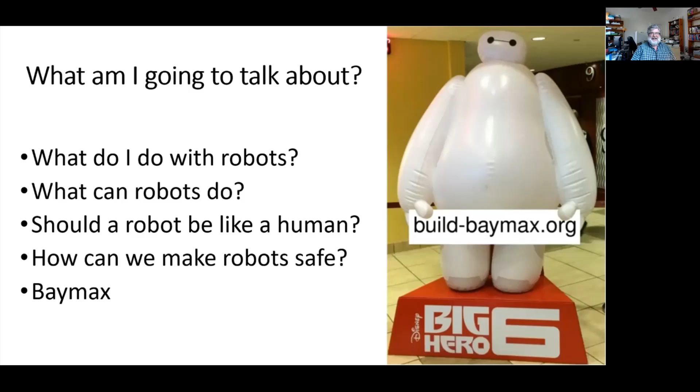Okay, good. So what am I going to talk about in the next hour? Well, I'm first going to talk a little bit about the robots I've worked with, and what do I do every day. A little bit about what can robots do, and ask a question: should a robot look like a human or act like a human? And then the question, how can we make robots safe so you can have one at home? And then talk a little bit about how the Baymax thing came about.

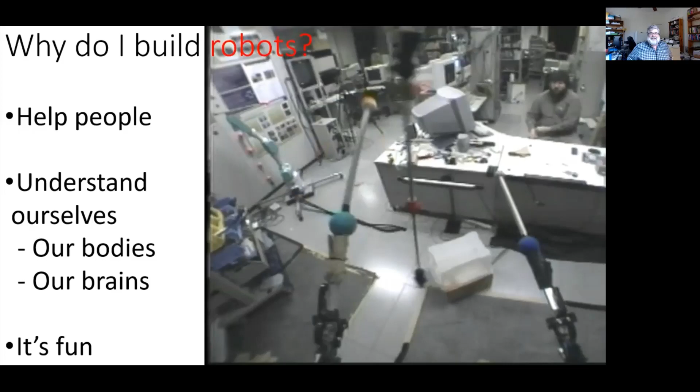Why do I build robots? I want to help people. I want to understand how people work, how our bodies and brains work. And it's really a lot of fun to get a robot to do this kind of thing. It's very exciting.

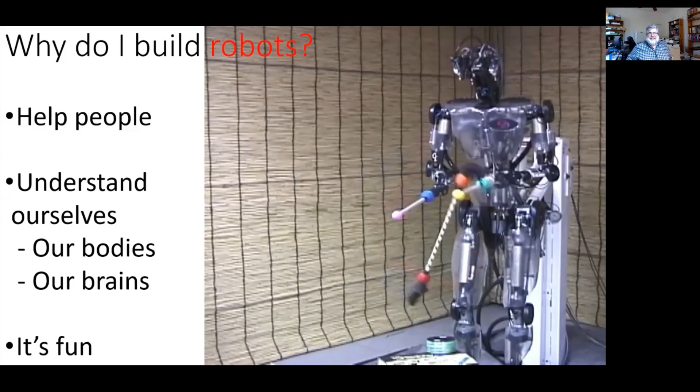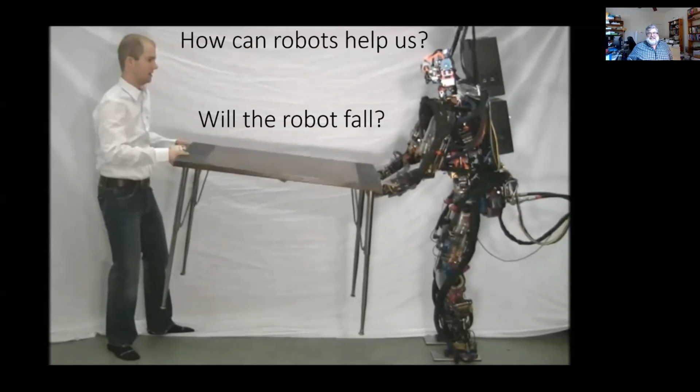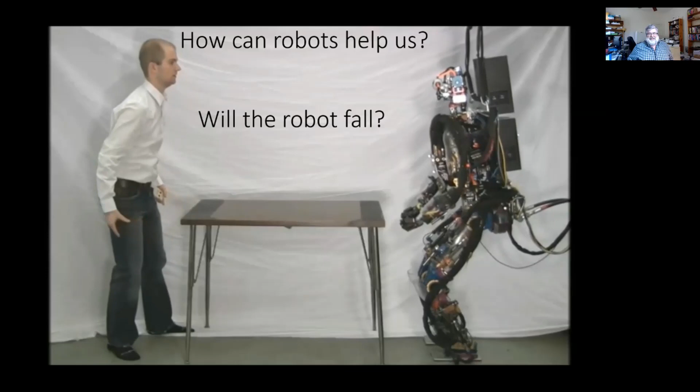Here's an example of a robot helping someone lift a table. The student, this is a graduate student, is trying to test the robot by moving the table around. He wants to see, is the robot going to fall? Later, after the robot revolution, if the robot's angry about being pushed around like this, maybe it'll come back and go after that graduate student.

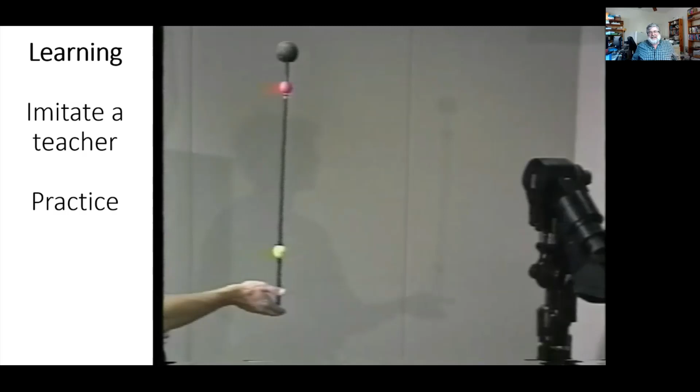It's a lot of work to program a robot to get it to do anything. So what we'd really like is to have robots learn, maybe not in the same way that humans learn, but humans do acquire the ability to do a wide range of tasks. In this case, the robot was watching the human balance a pole on its hand. This is something you could do at home with a broomstick. If you get a shorter stick, it's much harder. So you can see how short a stick you can do. Now I'm going to show you the robot if it didn't have a teacher.

And if it didn't have a teacher, it's starting from scratch. And you can see that this time it's dropping the pole, whereas if it had a teacher, it didn't drop the pole at all. So in case you're wondering, this is evidence why teachers are good for you. They help you learn faster.

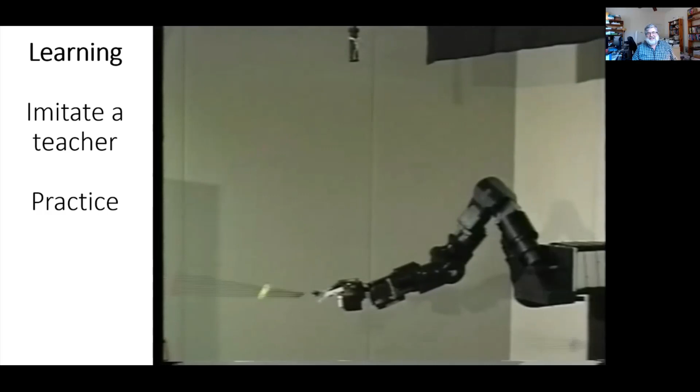There are two kinds of learning going on here. One's imitating a teacher, and the other is practicing, going off the robot and practicing by itself. And you see the weight on the top of the stick?

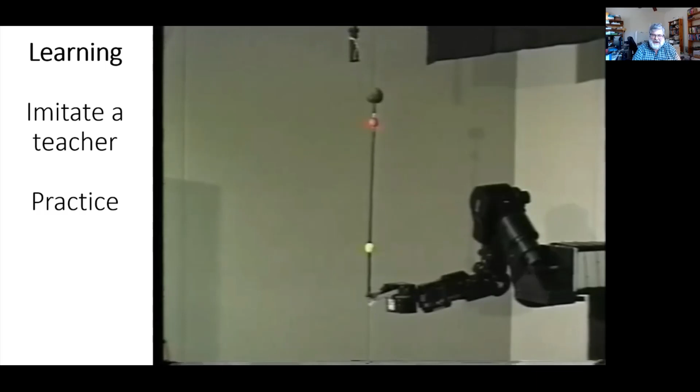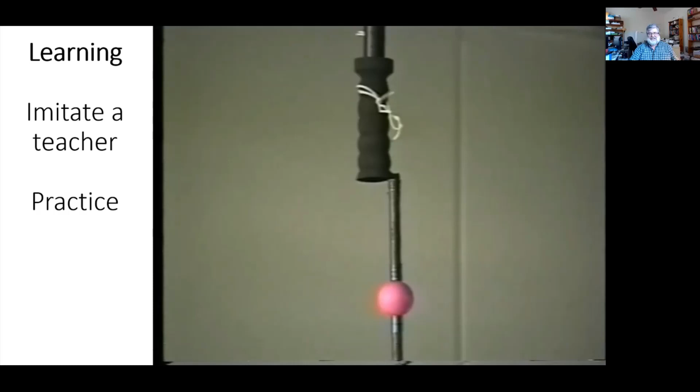We're going to remove that weight, and that changes how the stick works. And the robot's going to have to learn how to balance the stick after it's changed. So that's the top of the stick without the weight, and here we go.

It almost is able to do it, but then it drops it. Oh yeah, okay, looks like it got it the second time. So having experience on one task helps it learn a second task better or faster.

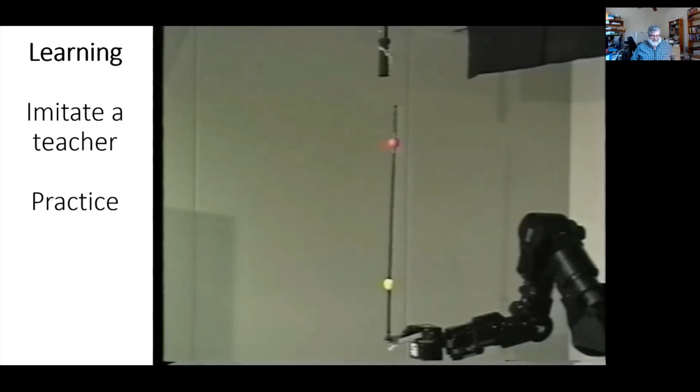Okay, here's another example. That's a young me. That's a paint roller, and what I'm doing is a task called swing up. This is after learning, and the robot can do what I did. And now I'm going to move my hand back and forth twice. So it's a little different style, and the robot learns how to do it the way I did it.

Okay, now I want to show you all the learning, how much practice the robot had to do. So this is the original demonstration. This is the robot's first try. It's not very good. This is the robot's second try, it's getting better. The robot's third try. The robot's fourth try. And that's the fifth try.

It's learning very fast. This is a harder thing to do, the double pump, because you have to get the right energy into the first swing and then preserve it during the second swing. That wasn't good at all. This is the second try, not so good. Third try, also not so good. Fourth try, it's not even getting the yellow ball above the red ball.

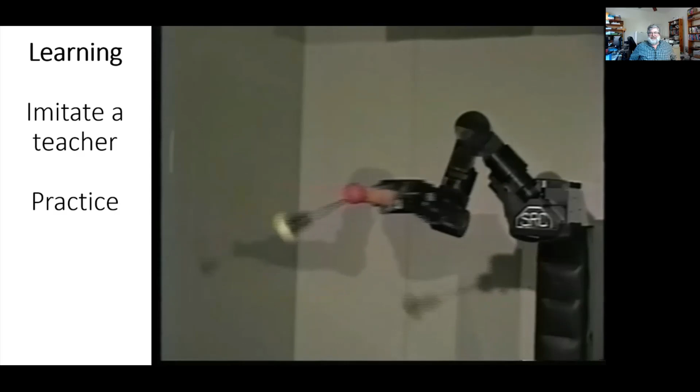Oh, here we go, we're making progress. And whoops, too far. Now many people watching this video think the robot gets angry at this point and is just swinging the thing around. But in reality, this robot has no feelings, it's not programmed to have emotion. Okay, in about 8 tries, it was able to do the task.

Here's another example of robot learning. In this case, these are two human beings, not robots. The one on the right is a graduate student. We replaced the one on the left, and what we did is we recorded all the hits that person made, a library of the hits, and then essentially put them in the head of the robot. And now when the robot sees the puck in this air hockey coming towards it, it looks into its library of what the teacher did and says, I'm going to do something similar.

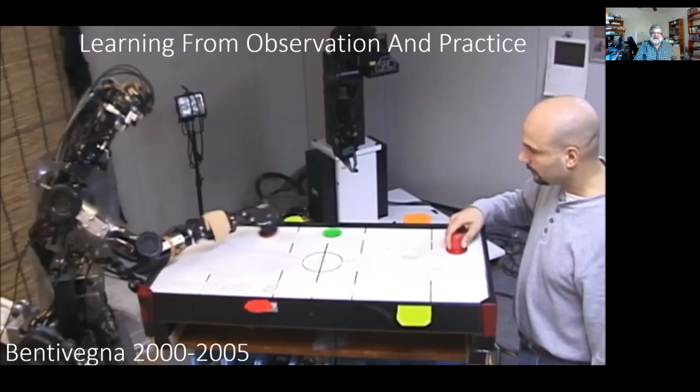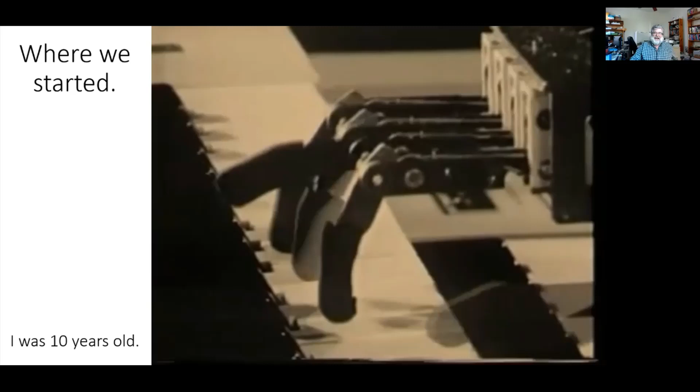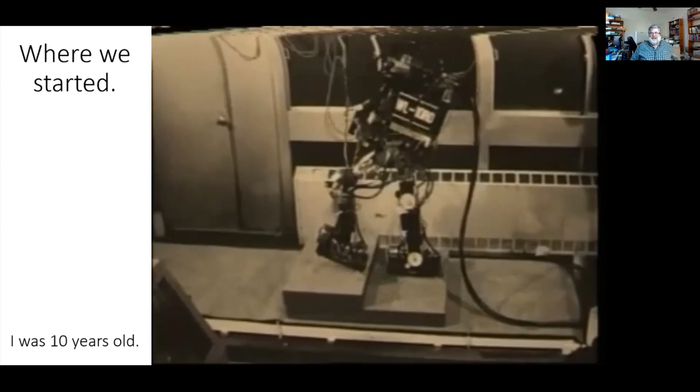I wanted to give you a little historical perspective. Here are some walking robots from 50 years ago, when I was 10 years old. And as you can see, they're very slow. This is actually a robot piano player that's providing the music for this. And a lot of these are Japanese robots. They're balancing all the time. You could yell at them, freeze, and they could freeze and not fall over, which is something that's not true when you're walking.

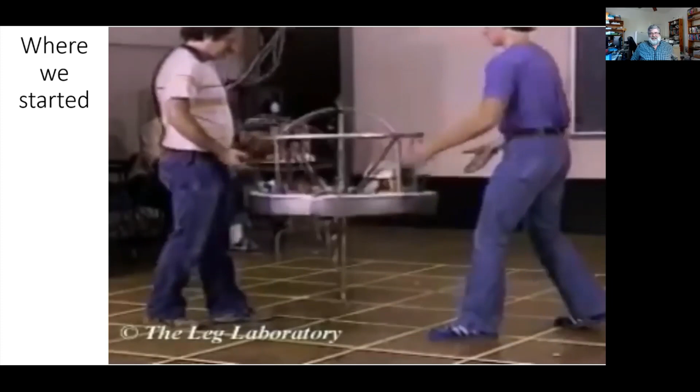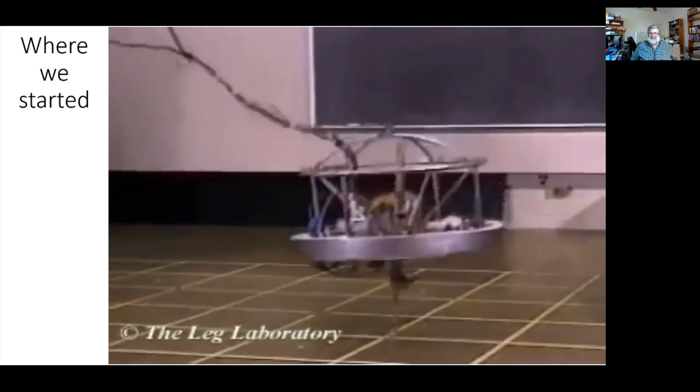Here's about 10 years later. This is when the leg laboratory was at Carnegie Mellon University. And they were actually exploring robots that had to balance, in the sense that you can't yell freeze at this robot, because if you do and it freezes, it'll just fall over. It doesn't have a big foot and it only has one leg. So this forced them to study balance.

And here we have a two-legged version on what's called a boom. And I want to let you know that the girl in the picture I eventually married. That's my wife.

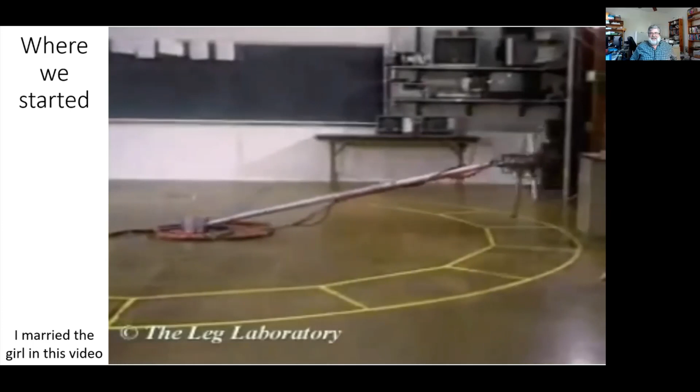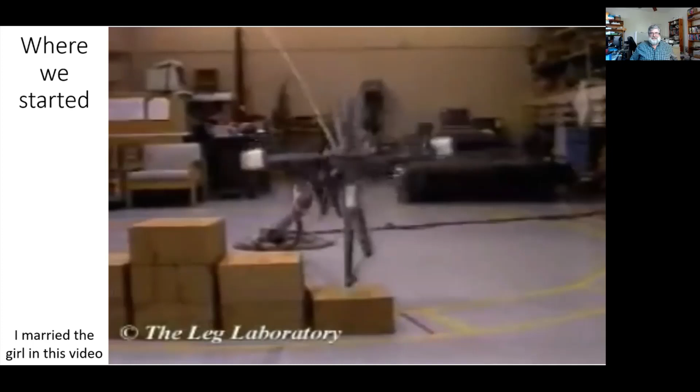Okay, so here we're running fast. So this robot can fall forwards and backwards, but it can't fall sideways because of the boom. Here it's going up and down some stairs. Here it's jumping over something. And here it's going to do a flip. And there's my wife again.

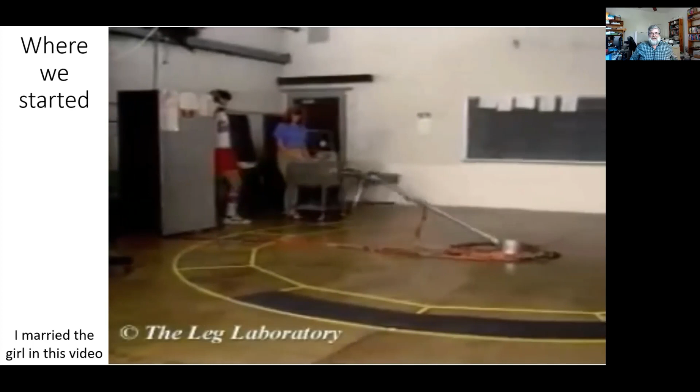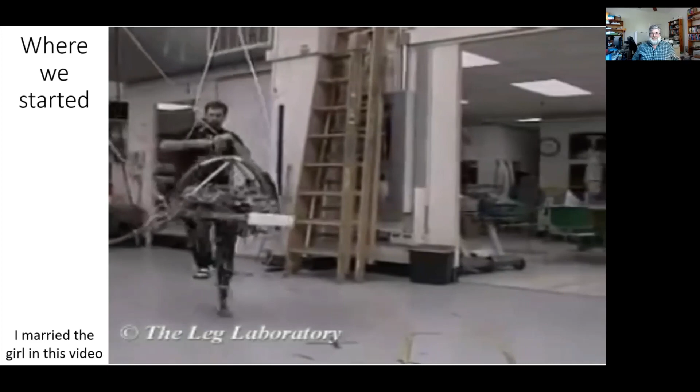Now, eventually, they got the biped off the boom. And this is the first time that particular robot was able to do a flip, so everyone's very excited. Here it is off the treadmill and doing a flip. It's a happy robot. This is a quadruped, a four-legged robot going down the hall.

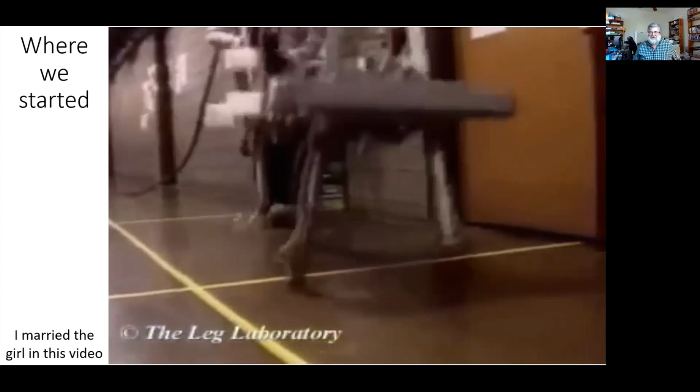Those are professors' offices and classrooms. The robot makes a lot of noise and they had to put tape on the floor to mark it. And here their lab wasn't big enough. And here again, their lab's not going to be big enough. But you can see in slow motion, the robot doing its thing.

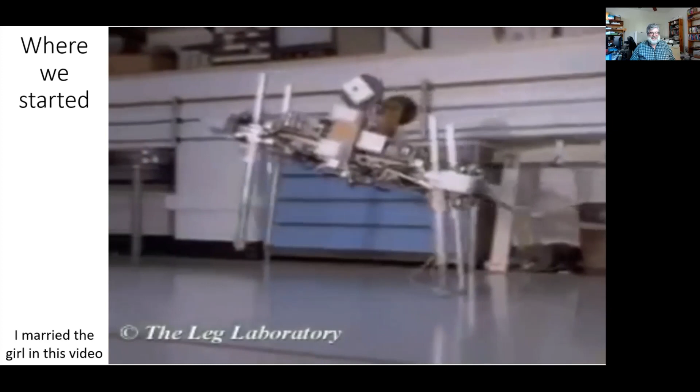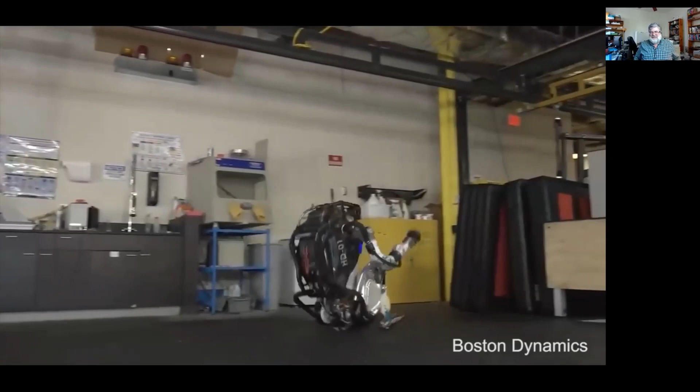Okay, now, about 40 years later, the same set of people have formed the company Boston Dynamics, and they've actually gotten their robot to do pretty amazing things.

I want you to look at the bottom of its chest, and you will see cracks where it dented itself. So it's not perfect. You see the crack? That's actually two cracks, right at the bottom of that chest. And now you'll see it without the cracks.

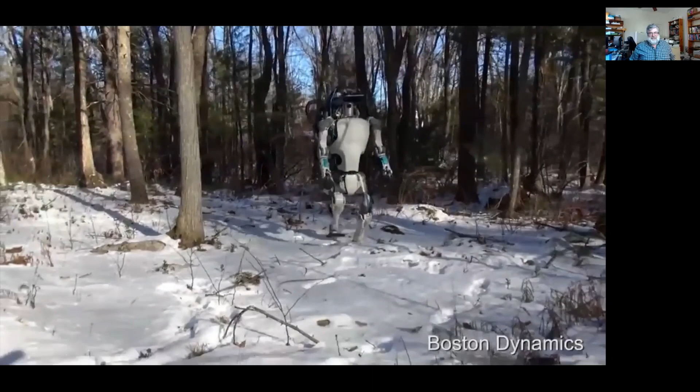Here they had it walking outdoors in the snow, and it looks pretty clumsy, but the point of this video is to show you how skillful it is that when the foot slips, it doesn't fall down. That's pretty amazing. As I'm getting older, it's harder and harder for me to do the right thing when I slip. So I'm very impressed with this robot.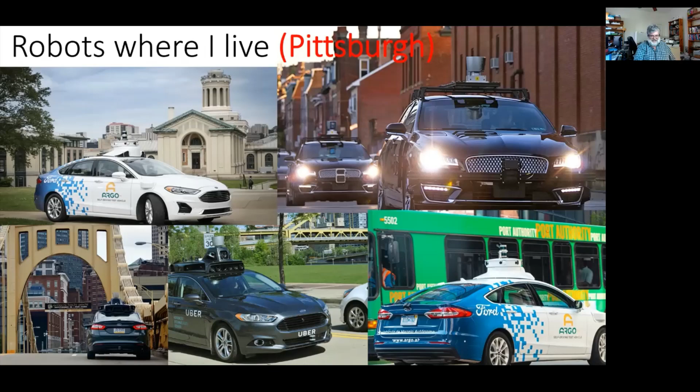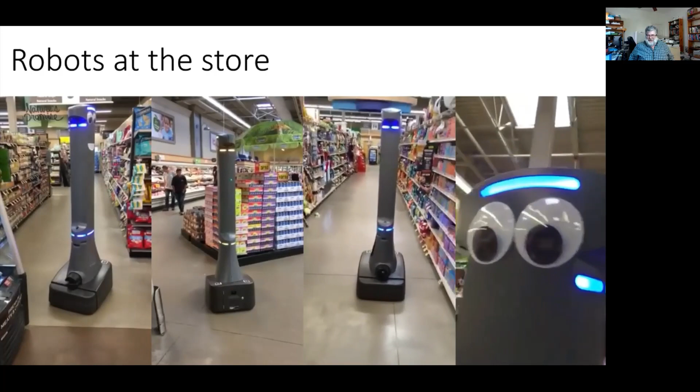Okay, so on the right-hand side, I'm going to move past it. There are the googly eyes. Ah, hi, robot, it's got a smiling face. And I threw a piece of paper on the floor, and this time it ate the paper. See, it got the paper. It's kind of like a big vacuum cleaner. The problem was that piece of paper was actually my shopping list. So after it ate the paper, I couldn't get it back, and I had no idea what I was supposed to buy.

Recently, to help doctors and nurses in the hospitals, people have been trying to put various robots in the hospitals. That's just starting out, so they're not yet all that useful, but it's clear that when we have these dangerous diseases, it's very helpful to have robots helping us because robots don't get sick.

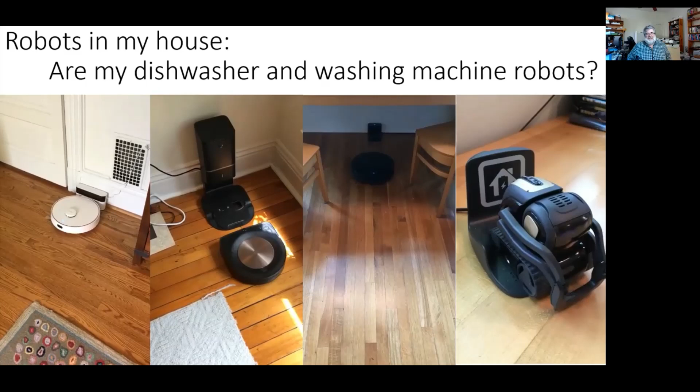Here, I wanted to show you some of the robots in my home. I have 3 floors, so I have 3 different robot vacuum cleaners because I'm trying them out. And on the right is something called a Vector. This is from a company, Anki, that actually was some Carnegie Mellon students from the Robotics Institute. Unfortunately, although the products were fantastic, they had a cash flow problem and went out of business. But my wife and I really enjoy interacting with this little robot on our kitchen table, and I enjoy launching all the vacuum cleaners every week and having them clean.

Now, I have a question for you, which you can answer on the chat. Are my dishwasher and washing machine robots? What do you think, yes or no? And what's the definition of a robot? If a robot is something that moves, the dishwasher and washing machine move. If it's something that has sensors, things that measure stuff, the dishwasher and the washing machine clearly measure stuff, at least modern ones. And do they think? Yeah, my dishwasher and washing machines have computers in them. So yeah, they think.

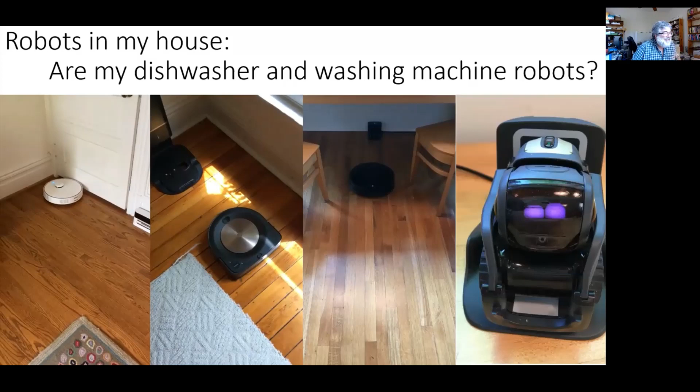So my vote is yes. What did you guys vote? Hey, yeah, I got all yeses. That's fantastic. Practically everything is a robot.

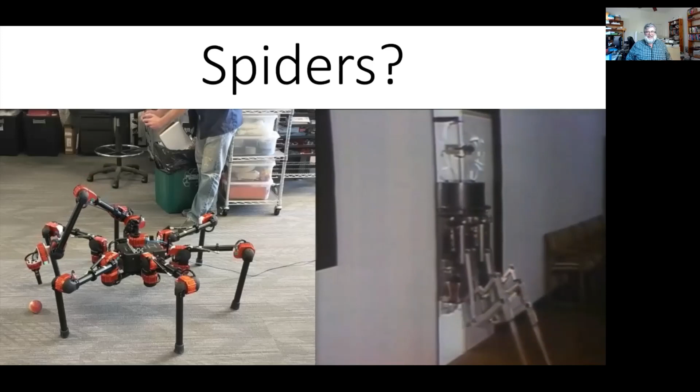So here are some robots that sort of look like spiders. They have only 6 legs, not 8 legs. The one on the left has an arm. But my question to you: is this a better robot design? One idea is if you have lots of legs, you can put hands on some of them, and they can switch between being legs and hands. If you have a lot of legs, it's much easier to balance.

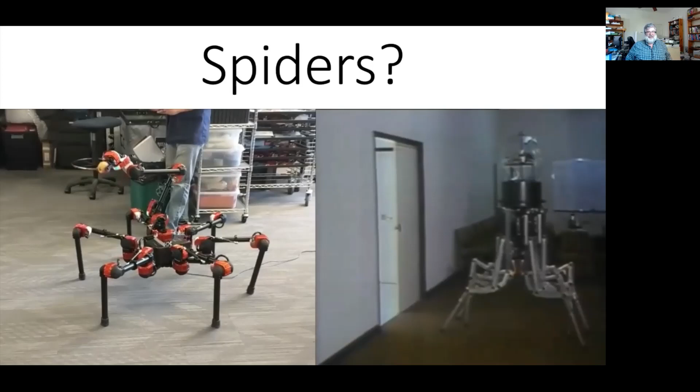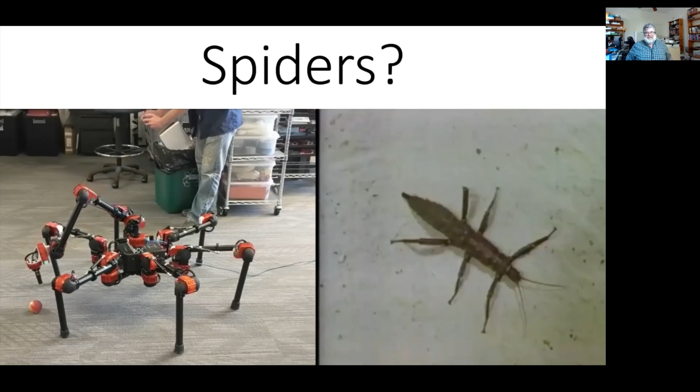So if you had 8 legs, you could still be on 4 legs and have 4 arms. In this case, they have 6 legs — you could stand on 4 legs and use 2 of those as arms. So maybe that's a much better robot. Whoops, we have a bug. Maybe that's a much better robot than those other robots.

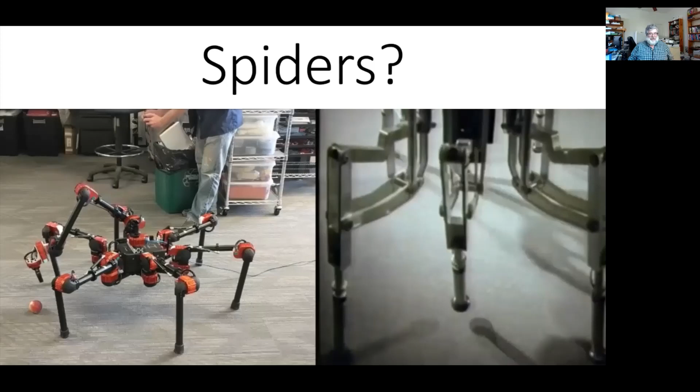But here's the question: if you were in a hospital, lying in a hospital bed, would you be happy if a robot like this came to take care of you? Or if you were an old person living in assisted living or a nursing home, would you be happy if this was the robot nurse? So that's my question to you.

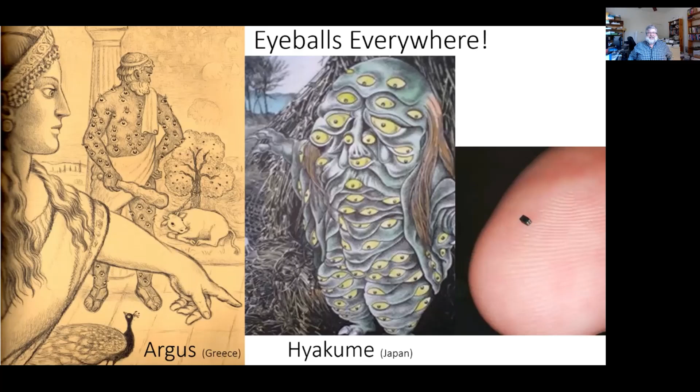And on the right-hand side, that is the world's smallest camera on top of a finger. So if you think, wow, 100 cameras, that's going to be really bulky, it's too much — we can get really small cameras.

Okay, yeah, all right. I'm not sure why the technology failed me there.

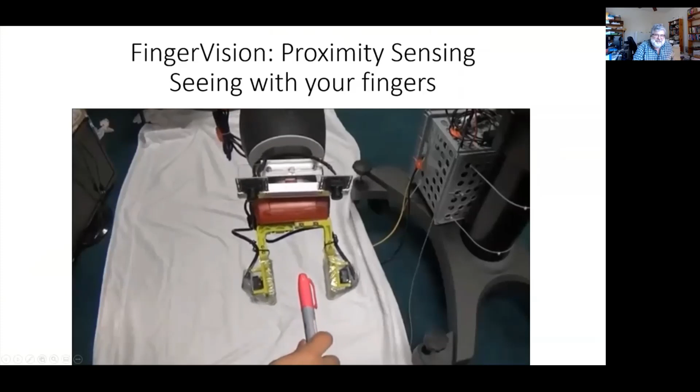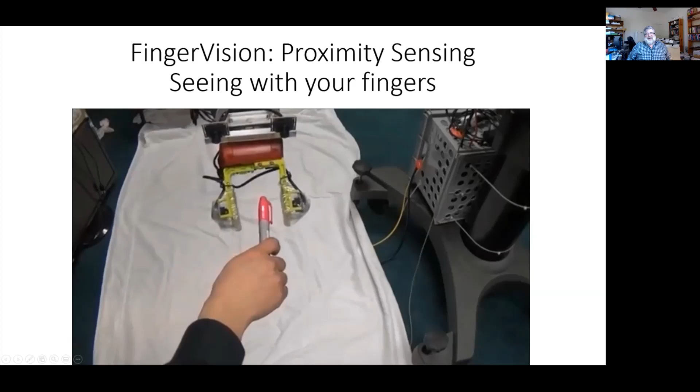So here's what happens if your fingers can see. You don't have to touch something, but you can adjust so you're always ready to grab it. And instead of stubbing your fingers on it, you just move with it. So in this case, because we have eyeballs on our fingertips, we can see with our fingers.

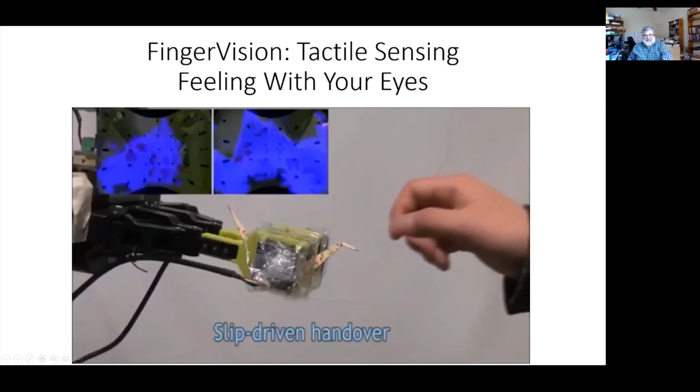And if you have eyeballs on your fingertips, you can actually manipulate very delicate things. That was an origami crane without crushing it.

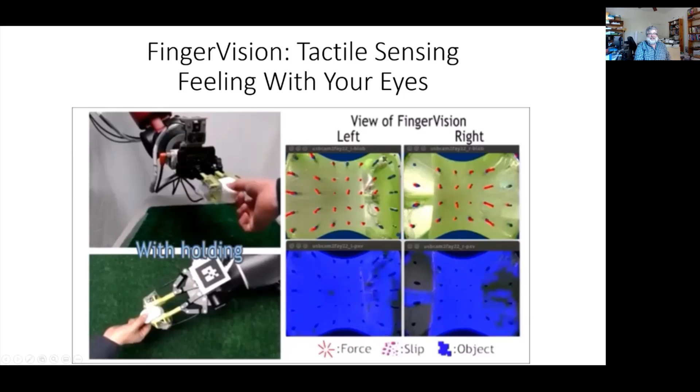And what we're about to look at is a tug of war between the robot and a person where they're both holding on to a marshmallow. So you need very good control of your forces in order to do that. That's one of my current research ideas.

How are we going to put 100 eyeballs on a robot? Here's another question. Earlier I asked you, well, is a dishwasher and a washing machine a robot? And a lot of you said yes.

Now, this is before we had Alexa and Siri and all this other stuff, so it was a big deal to get the house to talk to you. Nowadays, it's no big deal. You just buy yourself an Alexa, or if you have an iPhone, you talk to Siri or Google Home or whatever. Pretty much everybody's home and everybody's car is going to be a robot in the sense that you can talk to it.

Okay, so now I want to move on to another question, which is, how are we going to make robots safe? Most of the robots I've worked with, and here are two of them, are made out of metal and they have a weight problem.

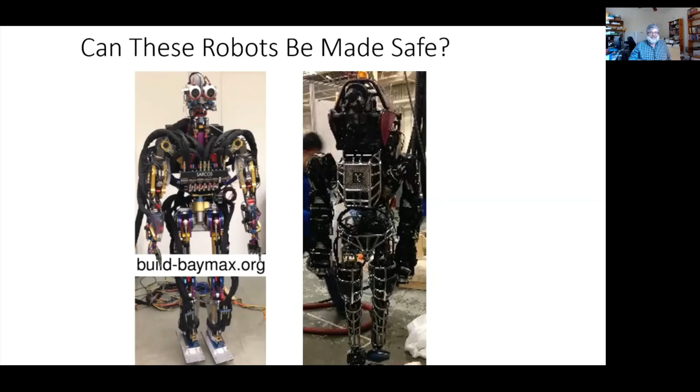How are we going to have these things in our house helping us if they're so dangerous? So to give you an idea, here's the same robot you saw before, and in this case, a graduate student kicking it. I hope this gives you an idea of how big and heavy it is.

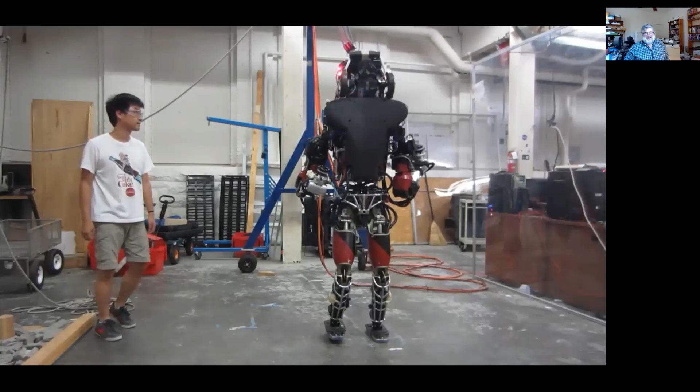It moves very slowly. Now, it's smart enough not to fall down, but if it did fall down, I sure wouldn't want it to fall down on me. And you can see we have safety ropes attached to its head because we don't want it to hurt itself when it falls down.

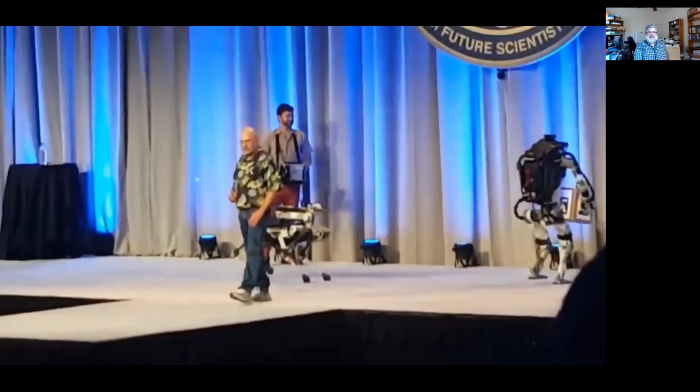Here are some examples of robots having accidents. I want to show you one of the robots. So this robot fell off the stage. That guy was driving it, so it's really his fault.

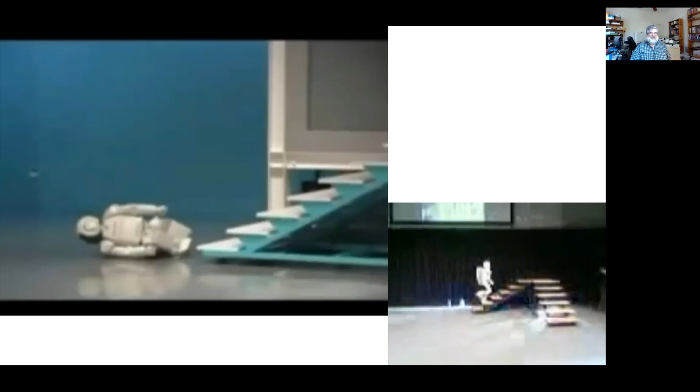This is a very famous robot from Japan, the Honda Asimo. It's done many of these kinds of shows, and I think only twice has it fallen down. The company says it fell down because its computers crashed, so it had no brain at that point.

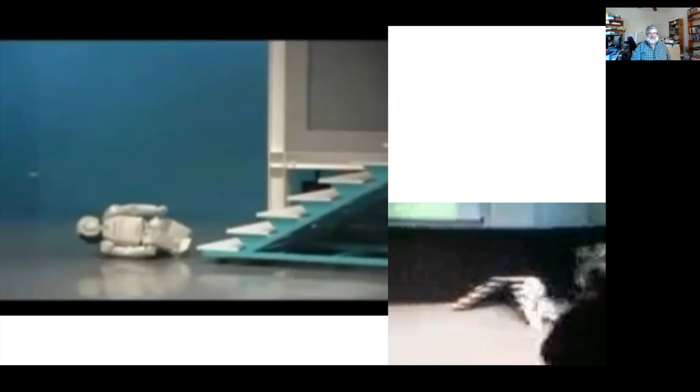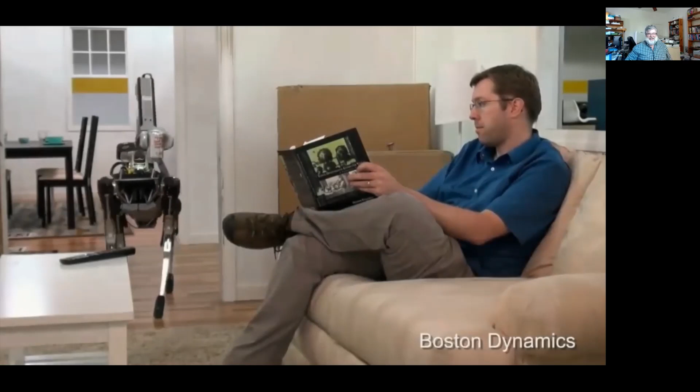So this is a big problem. It means you can't use a brain to make you safe. Here is a Boston Dynamics robot trying to put the box down, and just everything goes wrong. Whoops, whoops. Okay, here's another Boston Dynamics robot trying to give somebody, I think, a Diet Coke or something.

It's not working very well. The robot wants it back. Now notice the can's leaking at this point.

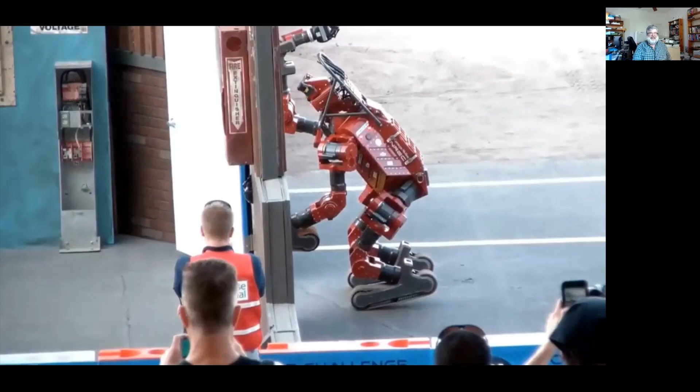And the robot falls down. Here's another robot falling down. This was a CMU robot. Look at the size of its feet.

There were two teams from Carnegie Mellon in the DARPA Robotics Challenge, and we had a big argument. One team, my team, made a regular robot that looked like a human, with relatively human-sized feet. These guys made giant feet, and they said our robot's never going to fall down. But their robot did fall down, and my robot never fell down. So I was very happy at the end of this contest.

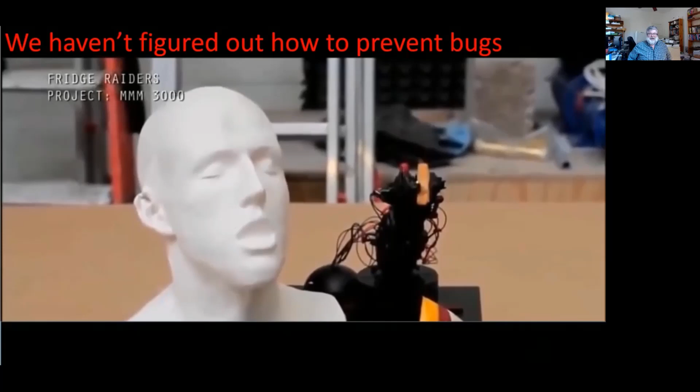Now, we still haven't figured out how to write programs that don't have bugs. This is a robot trying to feed somebody. It's not really working out. Lucky it wasn't a real person. This is a person with an artificial arm. He turns it on, and it goes what we call unstable. Okay, so that makes you really scared of robots.

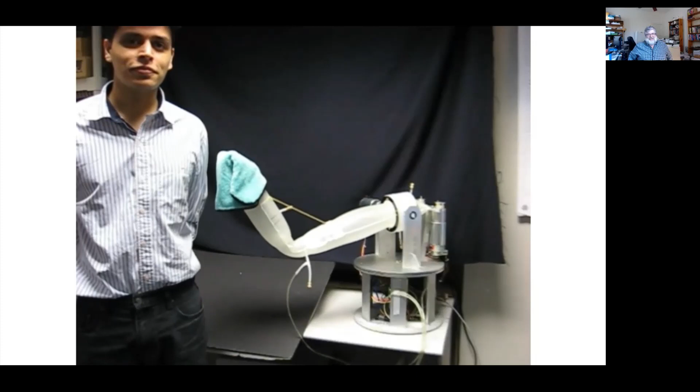So my idea was really simple. If we make the robot as lightweight as possible, it has very little mass, it's not going to crush you, it has very little momentum, it's not going to punch you hard.

So if we make it light, all the problems go away. So one way to make robots very light is to make them inflatable. This is a simple inflatable arm that's helping this guy brush his teeth. It has a very simple hand that inflates to lock onto things. Okay, so this gets me to the part of the story where...

We helped inspire Baymax. Disney, when it makes a movie, does research, particularly for the animated movies. If you remember the movie Frozen, it had a lot of snow in it, and the animators who lived in Southern California, many of them had never seen snow or played in snow. So how are they going to make a movie about snow if they've never seen snow? Well, they do research. In this case, they took a field trip to Norway and they played in the snow and filmed the snow, and that allowed them to make the movie Frozen.

So when a Disney director named Don Hall wanted to make a movie, Disney had just bought Marvel, so it had all these comic books, and the director wanted to make a movie about the comic book Big Hero 6, which had Baymax in it. Now, in the comics, this is what Baymax looks like: a giant transforming robot. Sometimes it looked like a robot, and sometimes it looked like a giant green lizard.

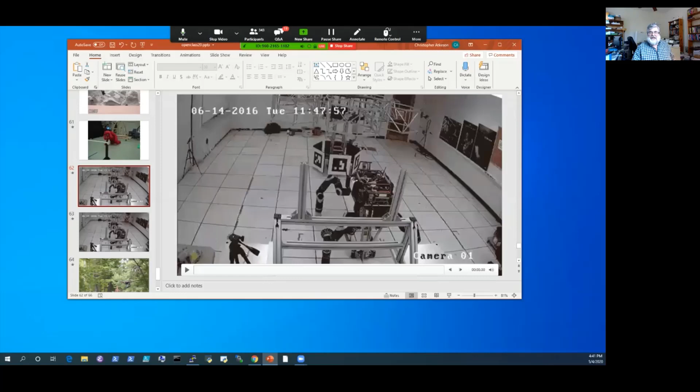Okay, so NASA had this robot sitting in a lab. All the scientists went out to lunch, and this is what happened. Boom! It blew up because its lithium battery decided to blow up. Nobody was there, nobody was using it, nobody touched it. Here is the explosion in slow motion. Very exciting.

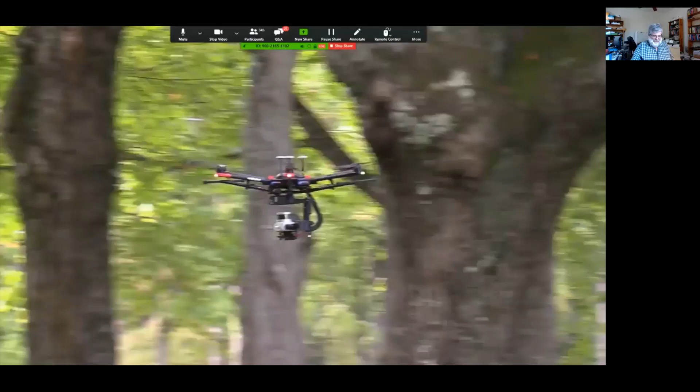You might think, wow, that scares me, I don't want to have a robot in my house. But the reality is the same kind of batteries used in your laptop can explode the same way.

What inspired Disney to make Big Hero 6? The answer is they wanted a robot that didn't look like any previous robot in a movie. There was the Terminator, a scary robot, Johnny from the Short Circuit movies, Frankenstein and others. They wanted a design never seen before, and the inflatable robot was something new. They were also happy about a robot that takes care of people, since Disney wants nice robots, not killer robots.

Can robots take over the server of Roblox? Unfortunately, Owen, I don't know anything about Roblox. I have a former student named Daniel Wilson. Let's see if we can get him on the big screen here.

This student worked with me, and he built a smart house that kept track of people. And that's Daniel Wilson.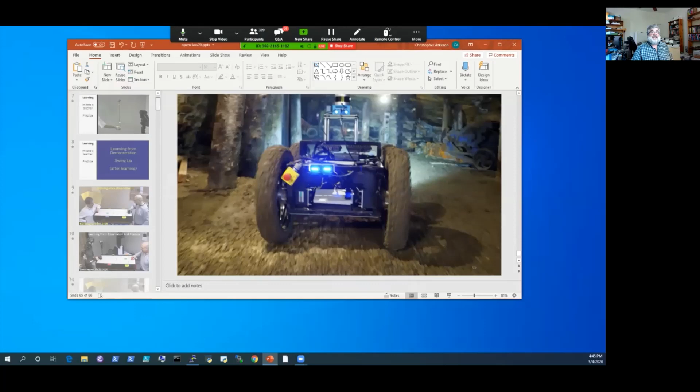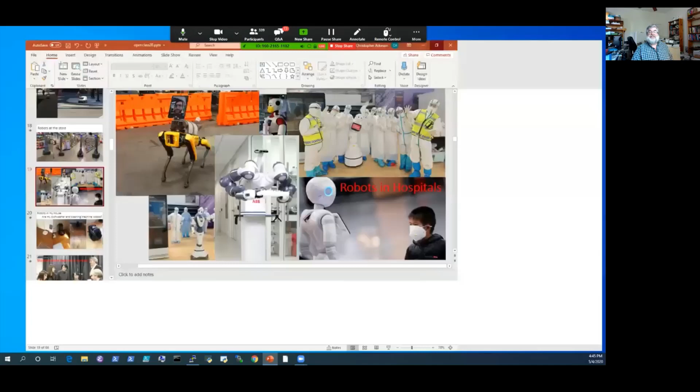To be totally honest, there are healthcare companions in mostly Chinese hospitals at this very moment, taking care of people with coronavirus. You can have a temperature measurement device, point at their forehead, measure temperature, provide food and drinks, help clean up after them, change their bed. All these things can be done with robots. The idea is let's not have nurses and doctors touch or get close to sick patients with contagious disease - let's get the robots close to them as much as possible. Nurses and doctors still have to do something, but it helps a lot if the robot handles most of the contact.

Let's see, on the upper left, this is the robot from Boston Dynamics, in the parking lot of a hospital in Boston, with a picture of a guy's head on an iPad or something. It walks up to patients as they come in, talks to them about how sick they are, takes their temperature, and tells them where to go. That means the nurses who normally did that job don't have to be out in the parking lot, don't have to wear all that protective gear, don't have to be changing the PPE every time they see a new patient. So even something as simple as putting an iPad on a mobile robot is very useful.

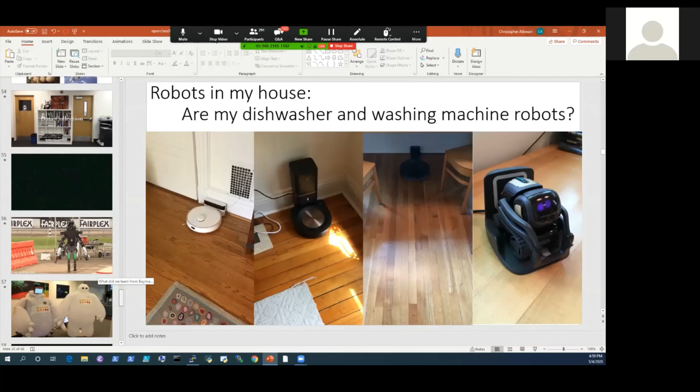By the way, here's a robot that's learning from scratch.

Okay, here's the deal. I'm an old person, so I'm going to use old programming languages. I learned C when I was about 20 years old. After a while, you slow down. You're not able to learn new stuff. So I'm still programming in C.

Most young people want to program in Python. I have colleagues who are fixated on Java. I can't understand why. There's something called Julia that now everyone's very excited about. But the reality is, I don't think it matters what language you use. C is handy because we still have a lot of very simple processors, and it can run very efficiently on those simple processors. But eventually, every computer we work with will be super fast, and it'll be irrelevant what language you use.

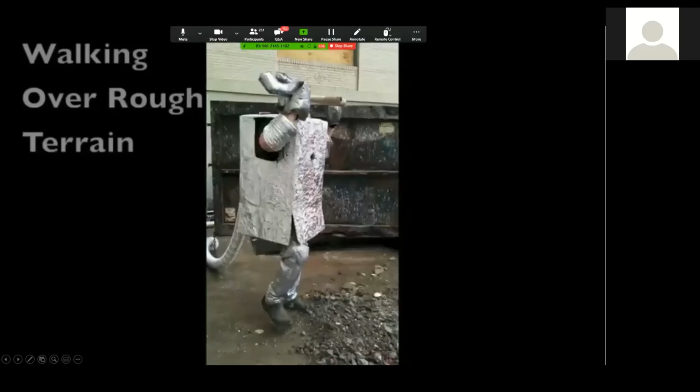Is there a robot that can use a yo-yo? I didn't hear that last part, say it again please. Is there a robot that can use a yo-yo? Yes.

So a good way to answer these kinds of questions is to go to Google and say yo-yo robot, except I misspelled it. And looks like we got a couple videos of robots yo-yoing. I taught a class on robot yo-yoing at one point. I'm kind of seeing if I show up here. Anyway, the answer to your question is yes.

And here is one, I don't know, it's kind of a squashed video. And they cheated, they made the yo-yo very big.

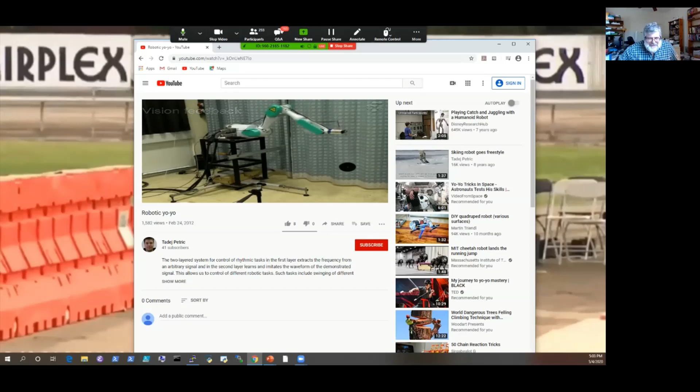Is Baymax a real robot? Not yet. I hope one day to be able to build Baymax. The people in the movie, or the animators, for some things violated the laws of physics. So it's actually not possible to build the Baymax they show you in the movies, but it is possible to build something that can do a lot of what Baymax did in the movies. And Disney is working towards that, and I and others are also working towards that.

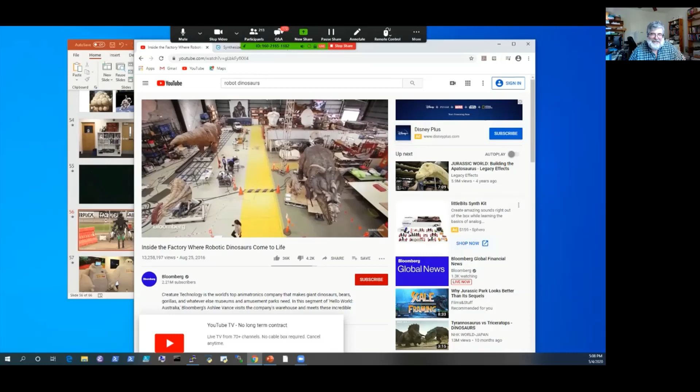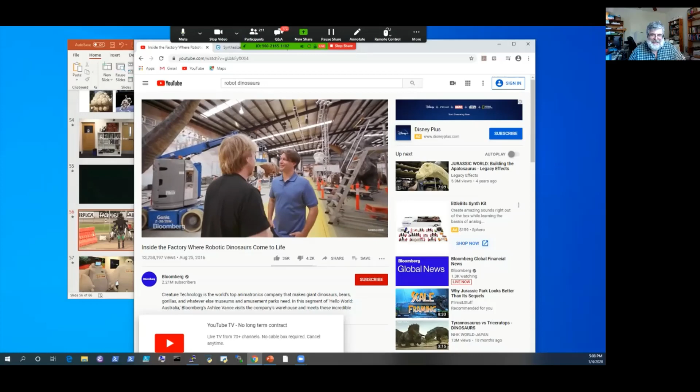Wow, wow, are they dangerous? Well, they're not dangerous like real dinosaurs in that they don't want to eat you, but they are big machines. If they stepped on you, you would not like it. And pretty much all big machines are dangerous. So yeah, they're dangerous, but they're dangerous like a car is dangerous or a bulldozer is dangerous.

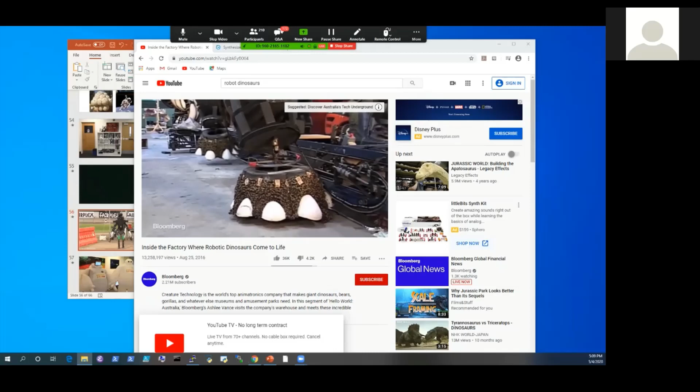Okay, cool, awesome. I don't know if you want to pull up a video of creating a robot, or you can just send it to us afterwards and we can share it. Well, I'll just put it out there. Anyone who wants to hang around, as long as you don't kill the thing, we can take a look at it. Yeah, so maybe what I'll do is show a couple slides first while you're searching. Full speed ahead, whatever you like to do.

Okay, so let's see, this is actually our talk today. That was so awesome, I saw so many new robots myself, very, very exciting. And we do these kinds of talks on a regular basis.

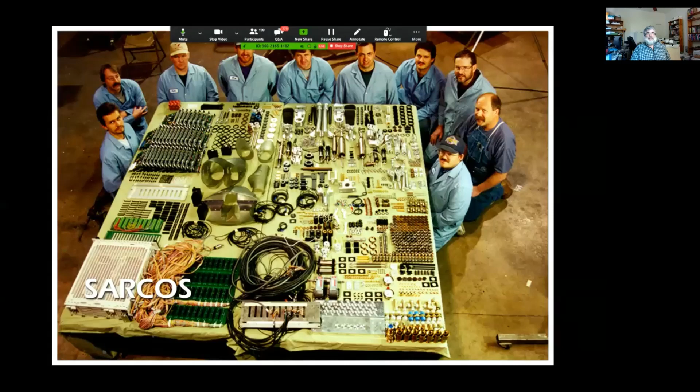Okay, boom. So for the robot that played air hockey, those are all the parts, and those are the people who made it. So if you want to know what it takes to build a robot, there it is, all the parts. Just imagine having to curate, purchase all the parts, and put them all together. You have to be very organized.